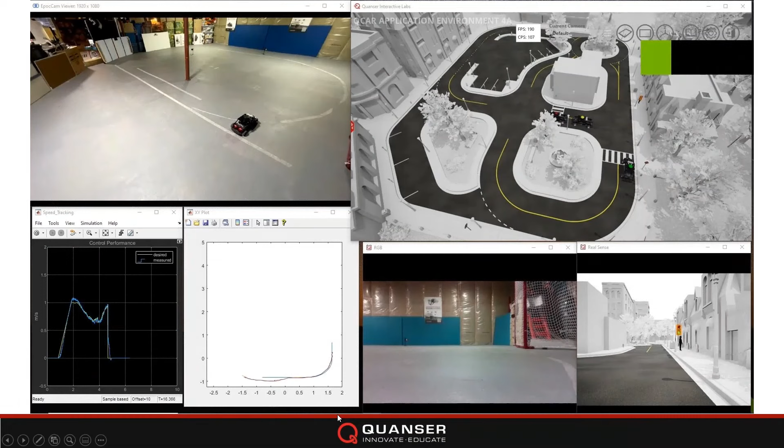So hopefully you'll get a good insight into where Quanser is heading, where we are evolving our research studio around this exciting field of autonomous systems and self-driving cars, and more specifically, as a result of the pandemic, how we are also taking advantage of digital twin systems in conjunction with our physical research studios as well. So I'm going to start right off the bat by showing you the complete mixed reality demonstration or application that I've been developing over the last few months.

So this is quite a dense and involved video. So what I'll do is I'll give you an overview over it and walk you through it. Then I'm going to dissect it a bit and give you some insights into how it came together, why it came together, and where we believe as a company this type of technology and this type of research can really benefit yourselves and all the amazing research that you're doing, and really allow all of us in this community to ask very intriguing questions about the future of all things self-driving.

So before I start the video, I just want to give everyone sort of a bearing over what you're actually going to see. So this is my basement, my pandemic lab, if you will, at my house in Toronto, Canada. And what I've done here is basically provided a map, a physical map, even though there's nothing on the ground. And basically this car, as far as it's concerned, is localizing itself using LiDAR and then calibrating that to this type of map. And so you'll see that the car will drive around. This is sort of the perimeter of the map that it will drive around.

And while it's driving around, there's a bunch of different systems implemented on the car. Obviously, I'm using the LiDAR as a means to self-localize. So that's really one great benefit that we've developed alongside our Quanser QCar. And it's also using a slew of its sensors. In this case, it is using predominantly the RealSense RGBD camera, and it's using the distance measurement to avoid obstacles, collisions, other cars, other people, obstacles in its way. So it will modulate its speed based on distance and obstacle in front of it.

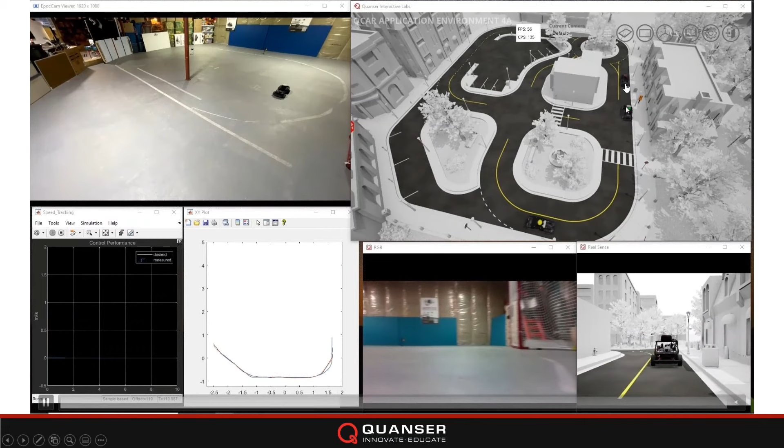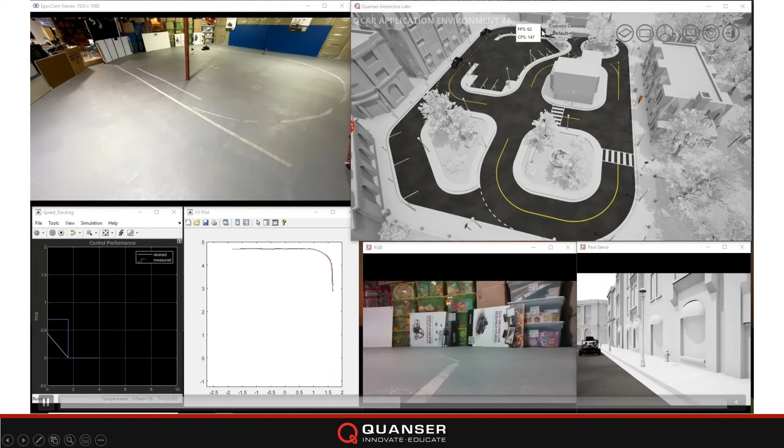So you can see my green car right now had to modulate its speed. And it's doing so because the virtual red car is communicating to the physical green car its location, and then the green car is modulating its speed. Think about it as an adaptive cruise control to sort of mimic and maintain a distance from the car in front of it. So in essence, it's slowing down as a result of vehicle-to-vehicle communication.

And then you can see now it's a cascade effect because the yellow car is now behind the green car, and the same things are happening. And you can see all the while all the other systems are running, it is still classifying images from the physical space and reacting to other virtual infrastructure elements, for example, stop signs and other cars and so on. So this is, again, a lot of information in this video. This is the complete mixed reality application.

There are many ways of doing it, and part of the benefits of working with Quanser and our systems is really your imagination is really the limit of what is possible. We pride ourselves on providing complete open architecture systems and the ability to really configure, especially when you get to multiple vehicles and multiple agents, really interesting topologies of communications, control, infrastructure, and so on. So we'll come back to this video. I'm not expecting anyone to absorb too much of it, but this is sort of how this particular application came together.

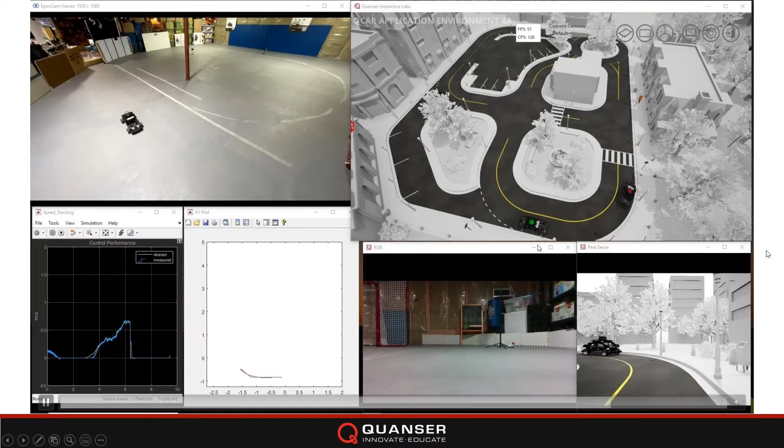So just taking a step back here, for those of you who might not be so familiar with who we are, Quanser is an academically focused company. We've been in this business for 30 years working with engineering departments and schools across the globe, and we're very proud of our approach and our focus on academia, especially engineering academics, both in the undergraduate space of teaching and bringing very important engineering concepts to life in the lab, plus our ability to work with researchers around the globe as well, allowing them to push the envelope of whatever particular research area they're interested in pursuing. And we've been doing this for over 30 years.

The company was started in 1989 by Dr. Jacob Apkarian, who was a professor at the University of Toronto, and very quickly realized that he was teaching a control systems course, yet his students were getting lost in the mathematics. It's a very real subject, control systems. You are controlling or governing the speed of a car or the temperature of your house. And these are very real systems that everyone interacts with regularly, yet the mathematics can get kind of scary and out of hand. So how do you ground that? By allowing them to realize that theory and bring those concepts to life in a laboratory experiment.

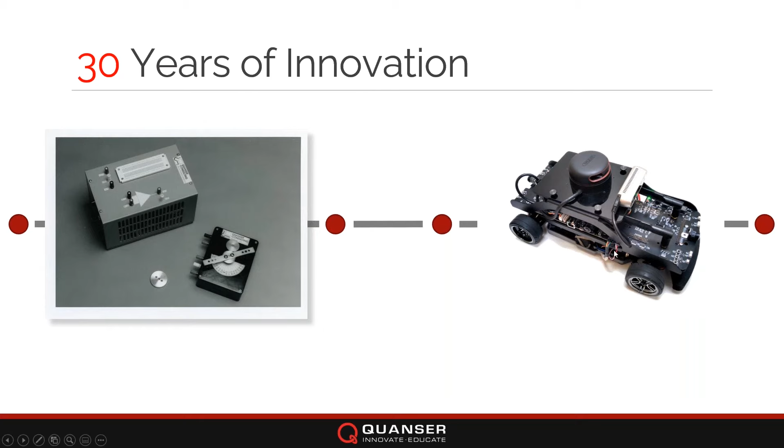So he developed this set of original Quanser products, and over the years we've evolved that approach and that philosophy into a much broader scale of offerings. And here's a good cross section of the different types of systems that we've brought together over the years. And most specifically, through the pandemic, like I mentioned, we've released digital twins of all of our most popular products. And now what I'm going to be showcasing in this webinar is the digital twin of our self-driving car studio. And that's where things get really interesting, because you're able to take advantage of a lot of virtual and digital assets, and use that to continue and develop the research, both on the physical cars and the virtual cars as well.

What ties all our products together are some of these Quanser primitives or technological primitives. So everything we do is completely academically aligned to engineering courses and research. All our systems and our hardware are completely robust, expandable, and repeatable. It's a very important part of our approach. When we provide a system, we provide the mathematics and the models behind it, and we sweat the details to ensure that every single unit, from one unit to another, from year over year, will behave and be governed by the same dynamic models, because that's what allows students and researchers to make that connection from the theory to the practice.

We're very proud of our software architecture and approach. A lot of the systems that you're going to be seeing here, a lot of these demos, are a combination of software environments like MATLAB, Simulink, Python, ROS, TensorFlow, and so on.

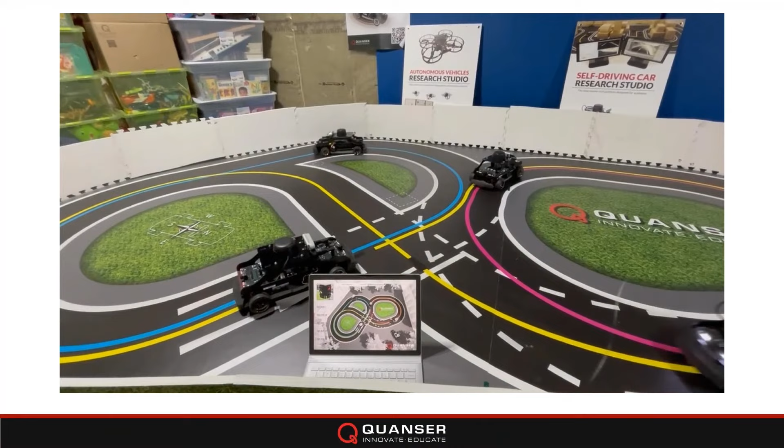And really, this video highlights where some of this thinking about the mixed reality or the digital twin came to life. So through the pandemic, we worked with one of our partner organizations where they wanted to take advantage of the Quanser QCar and our self-driving car studio to put together a STEM experience for high school and elementary students. And as we were developing it, the architecture that we deployed was that this whole experience was governed by a central infrastructure. In this case, it was this laptop broadcasting information to all the different cars, and the various cars were communicating with one another, plus with the infrastructure.

But you can see here that there isn't a physical traffic light, but they're all behaving as if there is a traffic light, because in the digitally connected twin, there is a traffic light, and that traffic light state is being broadcast and communicated to all the vehicles, and it's governing them. So now, this is green this way, and it just turned yellow. Now that turns green this way, and all cars can go in this direction as well. So that's green over there, and you'll see as that turns to yellow and red, it becomes green again, and this traffic can flow this way.

So this was the beginnings of where I started to look at this and say, how much more can we expand on this idea of a digital infrastructure? How can it be governed by an infrastructure that is obviously software only, and how can that be used to expand some of this research?

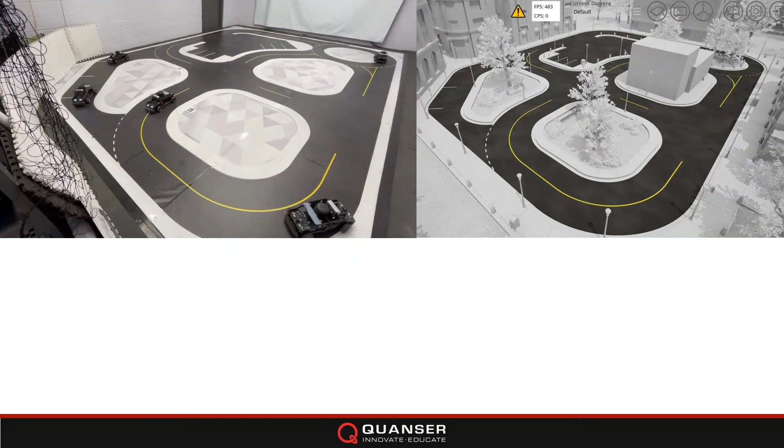Here's another really good example. So like I said, we've been evolving our research studio over the last few months, and this is a prototype of an upcoming map that we're going to be releasing to add a lot of value to our research. So here I have a simple controller running on all the cars. They're not really communicating with one another. So you can see there was a mishap there, and there was a collision, and now this car got a bit of road rage and is trying to get back at that car, but it stopped right there.

But these things are going to happen, and there's going to be times where, because in this particular case, I was just using the distance measurement from the RealSense camera, and in that particular collision or accident, it just simply was not looking at that particular area of the image that it was receiving. So there was a collision, and obviously if you only use one sensor, these things are often going to happen, especially in environments that are not controlled, and you can't guarantee sensor performance. Things can fail and so on.

So because of this type of example, that's where again our approach was, how do we enable a completely digitally connected world? So over and above the physical sensors and the physical local intelligence embedded in these systems. And of course that has to be there, and of course that's going to be a big part of the solution, making sure that these systems drive safely and don't have collisions like we just saw. And there's other software obviously you have, so that it doesn't go across the road and things like that.

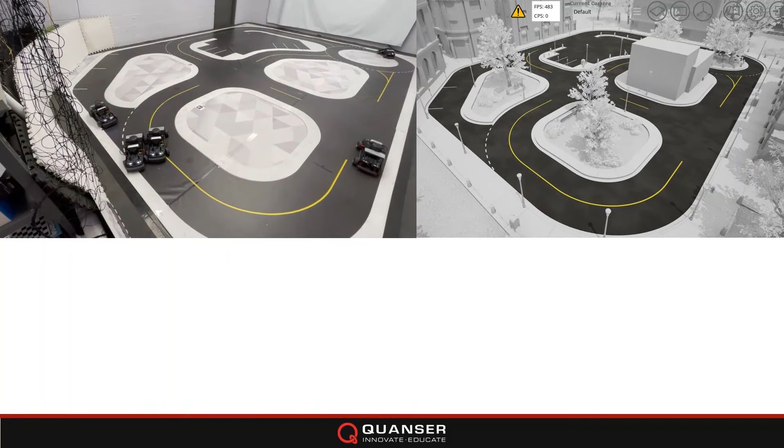But how much more beneficial could it be if these things were actually properly talking to one another, so that every single car was communicating to all cars in its vicinity, the infrastructure in its vicinity, and how much richer could that experience be, the information be, and the safety, controllability and performance could be if you augment all the physical intelligence and sensors on a car with what computers do really well, which is talk and communicate and share very valuable information with one another and other systems as well. So it's not just car to car, but it's car to infrastructure, so V2V and V2I.

So I'm going to show you what we've put together into our upcoming virtual or digital twin release. So before we do that, I just want to highlight the architecture. In that previous demo that I showed, and actually in all these demos that I'm showing you, this is the architecture of the code. This is based in Simulink and leveraging Quanser's QUARC software that allows you to take a Simulink diagram and develop control systems and algorithms and applications in Simulink.

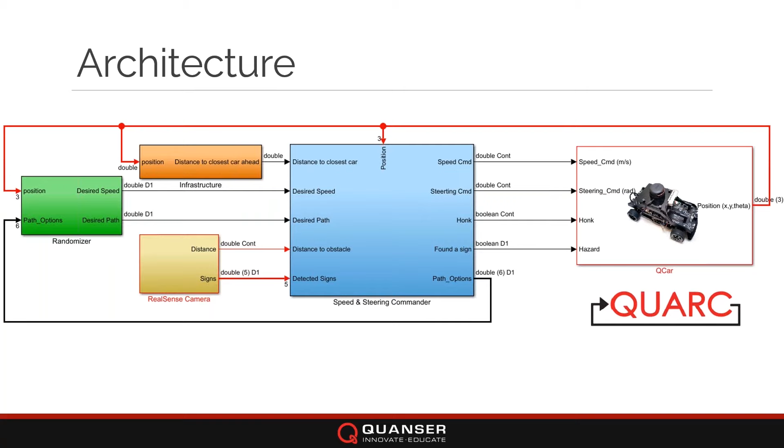And behind the scenes, we generate the real-time code, compile it, and then target it on the various vehicles, be it the physical car that's running an NVIDIA processor, or in the case of the virtual, it's running on the same PC that I'm using and communicating with the virtual environment that's rendered in the Unreal Engine. So the benefit of our approach with digital twins is that you can take the same code, in this case what you're seeing on the screen, and deploy it multiple times on various physical vehicles and multiple times on various virtual vehicles. And that's kind of what I've been doing as well, and you'll see how that came together in that initial application.

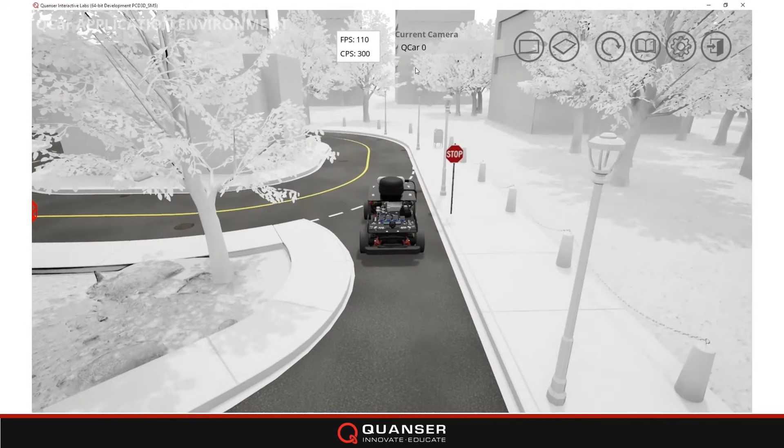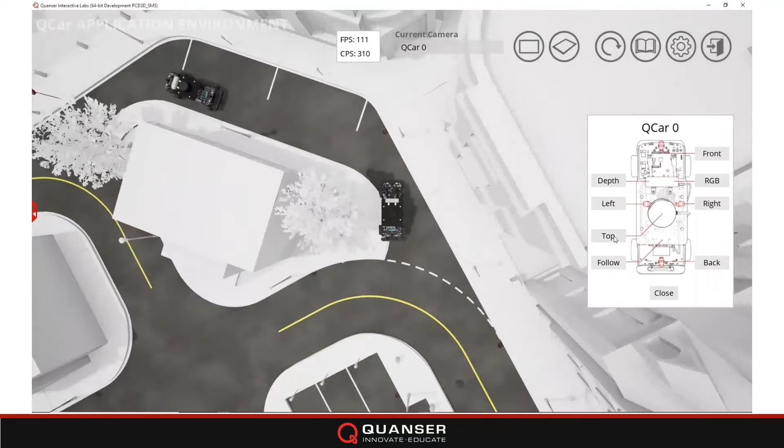So just some more insights. This is, like I said, probably the first time we're publicly showing the virtual QCar environment, the virtual self-driving car studio environment. And as much as we were very proud of what we've done with QLabs, and QLabs is Quanser Interactive Labs, our collection of digital twin assets, we've really taken it that much further with this upcoming release. In this case, the virtual car mimics the physical car, so you're able to deploy code to it the same way you do on the physical car, and you can simulate all the sensors and the dynamics and the performance on the car virtually.

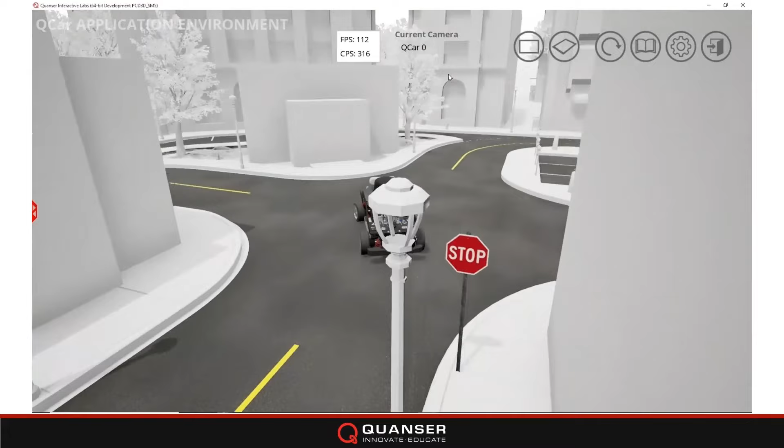But over and above that, because this is a digital immersive space, an open world, if you will, all the other benefits of that are also leveraged and taken advantage of. Our team that are developing these have done a fantastic job in providing us a lot more information. So in this case, I can view each car separately, so I can see the cameras from sort of a bird's eye view for each car. But even more importantly and more powerfully, every single sensor of interest, for example, on the physical car we have 4 CSI cameras that give you 360-degree view. Each one of those 4 cameras is rendered and simulated in this space.

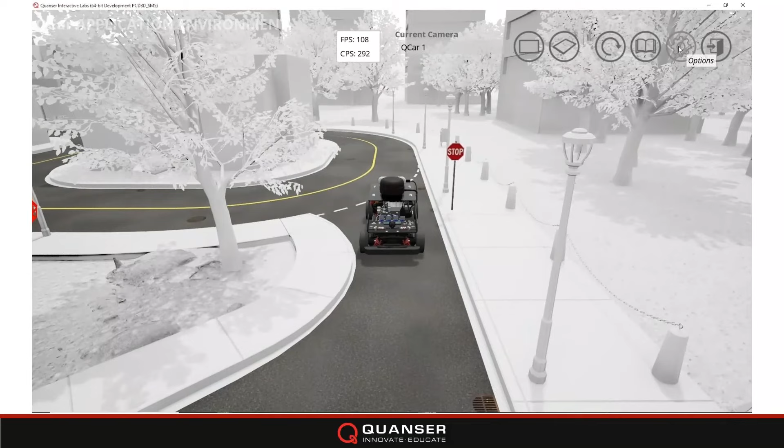So you can see over here, we have our front, left, right, and back cameras, and all of that information can be accessed through the different software environments. So you can make a call and say, provide me the camera stream from the front or the left, or my depth, or my RealSense RGB, and so on, or my LiDAR.

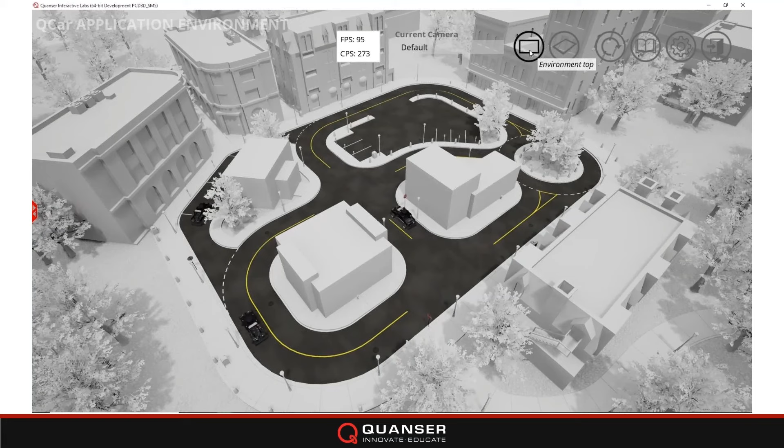And so this really allows for a lot of rapid development of algorithms. As much as we always believe that at the end of the day, a physical realization of these architectures and solutions is the best way to progress research and teaching, there's a lot of benefits in this digital twin, because you can iterate very quickly, you can try out different things, and in the example that I started with this morning, you can actually put it together.

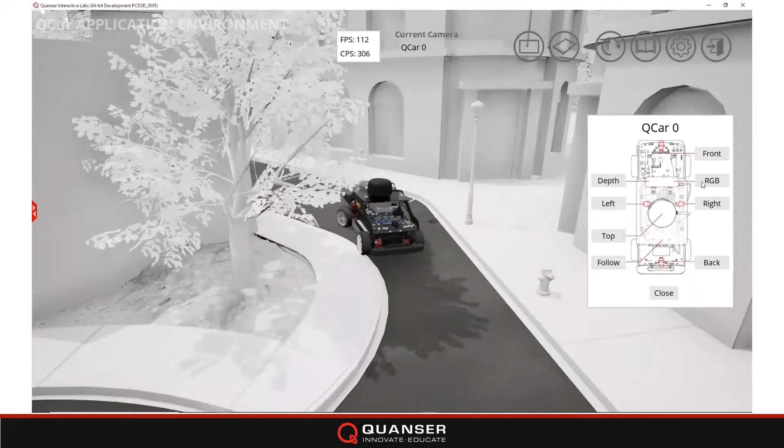And so you can now extend it. So if in your lab you have 2, 3, 4 cars, you can augment that with the same quantity, if not more, of the virtual cars. So then you can really develop some very interesting systems as they come together.

Here's another example, showcasing how I took advantage of the digital space to really optimize my V2V communication. So again, the same idea that I have a slow red car, a medium speed yellow, and a fast moving green car. And in this case, they're governed by this traffic light. Obviously, it's a digital traffic light.

But here's a good way that I was able to use the digital twin and this virtual environment to really fine tune my V2V communications and the algorithms that are governed by it, to ensure that once I deploy in the physical car, it's behaving the way I expected. And I can test out a whole bunch of corner cases. There's a lot of benefits without having to have two cars slam into each other repeatedly before you can tune your application. Here's just yet another example of how to bring it all together.

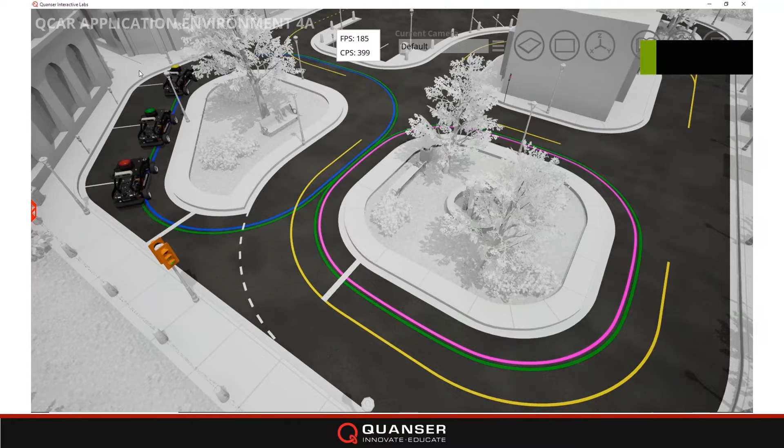So back to the initial application, the mixed reality. The impetus for that was for me as I started to develop these applications, and for us at Quanser as we start to look at how do we highlight the benefits of mixing the physical and virtual. Like I mentioned earlier, I truly believe, and I believe a lot of my colleagues as well, that the more information these vehicles have, the safer they can be. The more information they can have, the more optimal the traffic flow can be, or the energy efficiency or sustainability can also be.

Because over and above just position information or traffic state information, you can even communicate intent, where you're trying to go. If you're going to make a lane change, you can tell the world around you that you're signaling a lane change. How beneficial is that when you're driving and you see somebody put on their blinker? It's giving you a lot of information. Computers and cars can do that much better and that much more with richer information. You can be communicating speeds and intent and when you're going to be getting off and on and so on and so forth. And you can communicate other things.

For example, one vehicle could see a pedestrian, an obstacle, a hazard, and communicate that to the rest of the fleet or the systems around it. So again, all of these configurations and applications are really just the beginning, and this is just one small sample of how this could be leveraged to really challenge ourselves and challenge the state of the art of where this technology can go. Hopefully what you're seeing with our approach is this is a solution, an open platform, an open canvas for you to really ask these questions and pursue these answers as well.

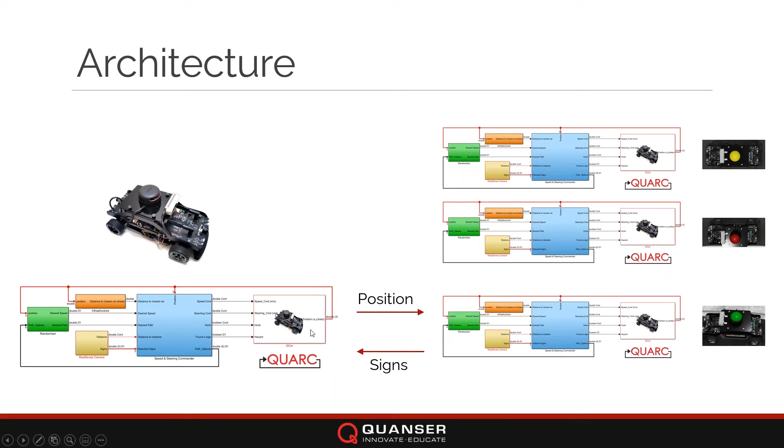And the final thing I did was I had another application that basically forced this virtual car to have the fixed position that's being broadcast from the physical car, and then any signs that I've classified in the virtual space of the analog or avatar, if you will, of my physical car were being sent back, so that a virtual stop sign would signal the physical car to stop, and so on.

So we'll go back again and rewatch this initial video, and I'll go through it one more time. Like I said, this is a very dense video. There's a lot of information, a lot of things happening in there as well. So it starts off with just a physical car driving. You can see how there's a one-to-one.

So in terms of what the green car here is doing, it's simply just positioning itself wherever this car believes it is. So wherever my physical car thinks it is in this space, it's being rendered in this virtual space as the green car's location. Now, the benefit of doing this, where the physical car is being tied directly to its virtual avatar, is that I can place different things in the virtual space.

I can have a pedestrian walk across it and find some code to react to it. I can, as I have already here, put stop signs in various locations, and it will classify them and react accordingly and so on. And then obviously, to me, the benefit was when I started to introduce multiple cars, in this case two other virtual cars, but we can extend that as well, and they can all have different behaviors.

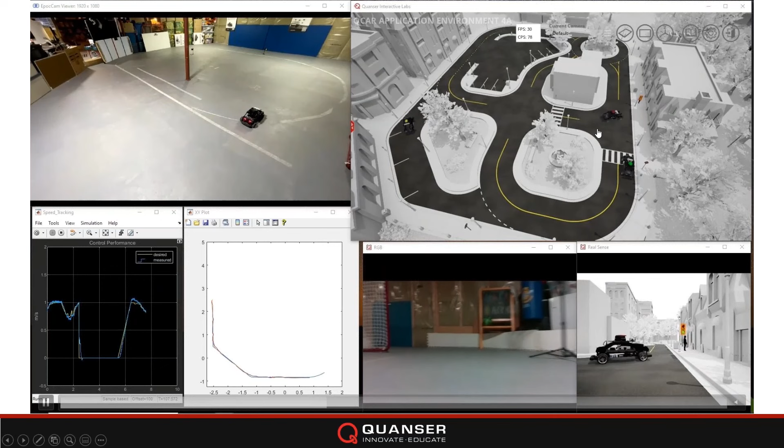Obviously, the code is still running here, where if I were to come up in front of it, it would honk at me and stop, or if it sees a stop sign, it would stop as well, same as the slow sign. So this is where things get interesting. I get my virtual slow car, the red car, driving. You can see immediately the physical car is reacting as if there's a car right in front of it. So that's again the benefit of doing things in mixed reality.

As you all know, there's always a challenge. As much as we can simulate and model all our systems, developing code on a simulation is very beneficial, gives you a lot of opportunities to iterate and trial different scenarios and so on. There's always a nuance when things get deployed on a physical system.

And that's really where Quanser has always shined. We've always been very proud that we allow researchers and educators like yourselves to take everything you do in the theory, in the lectures and in the research, and be able to validate, deploy, and really extend that application on a physical system.

In the same way, we truly believe in this ability to now not just do things physically like we've had for the last 33 years, but now also take advantage of the digital twin, the virtual assets that we provided. And finally, there are some benefits of mixing the two. And that's really what this application does, very simply mixing the two to extend some of its capabilities.

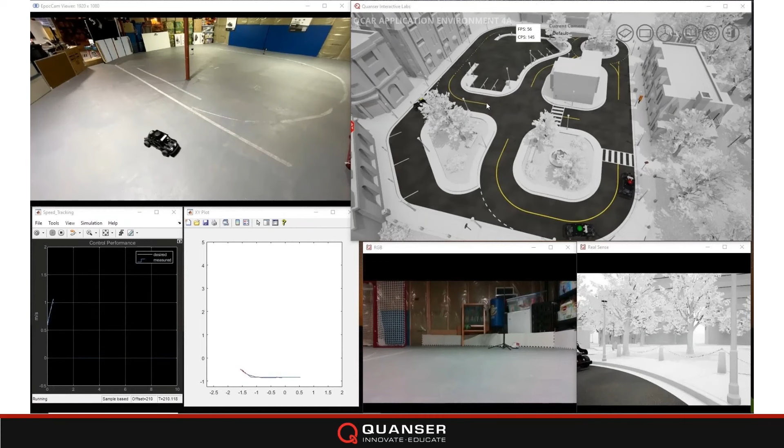Some very interesting development. I noticed some things that I had to change in my code because things don't translate one-to-one all the time, and then you have to understand why and the nuances of what's happening when you go from the virtual to the physical and back.

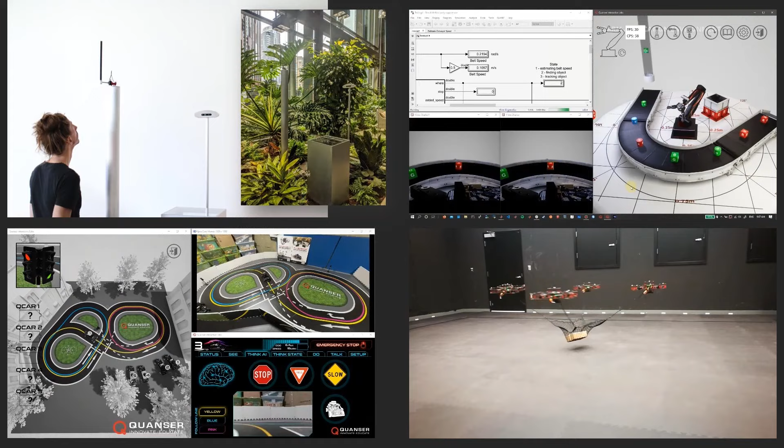Thank you very much, Paul, for a great presentation as always. And I think we can jump straight to Q&A. For a lot of our regular attendees and users, your basement lab has become a familiar and lovely scene; it's great to see how much development you've been able to achieve in your pandemic lab. Let's get to the questions, for which we do have a good number.

Let's start with a question that we actually get quite often, not just about the QCar, but also on our drone platform. The question is: is there a dynamic model for the QCar? For applying some of the algorithms, we need to know whether we should apply a model-based or a data-driven algorithm, for example, for fault detection algorithms. So is there a dynamic model available for the car?

That's a great question. So the physical drivetrain of the QCar goes through a DC servo motor, and that's fairly simple to model, and we do have a dynamic model of how you can translate from voltage applied to motion. So we have that modeled, and we can provide that for sure. The steering is a little bit more challenging. It is a servo-based steering mechanism. We do have a model for it as well, but it's less instrumented.